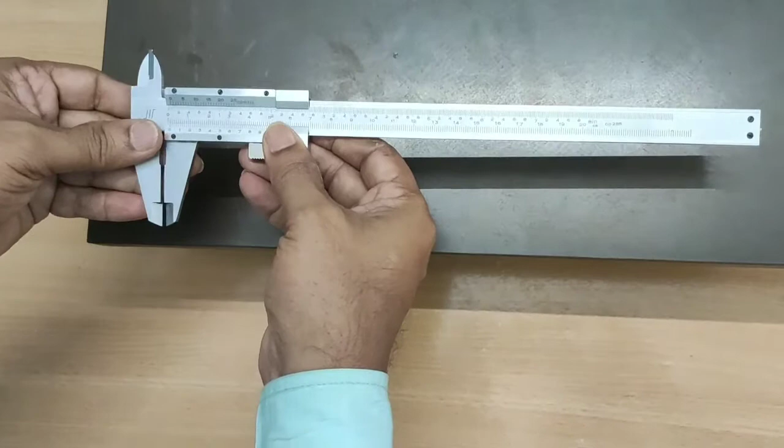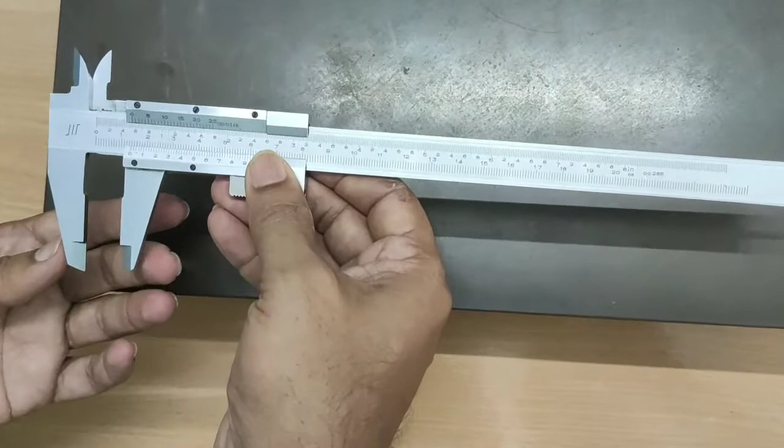This is vernier caliper. First of all, let us discuss different parts of vernier caliper. See, these are the hardened and ground measuring faces for external measurement, and these are hardened and ground faces for internal measurement. With the help of this caliper, we can go for external measurement as well as internal measurement, and we can go for depth measurement also by using this blade.

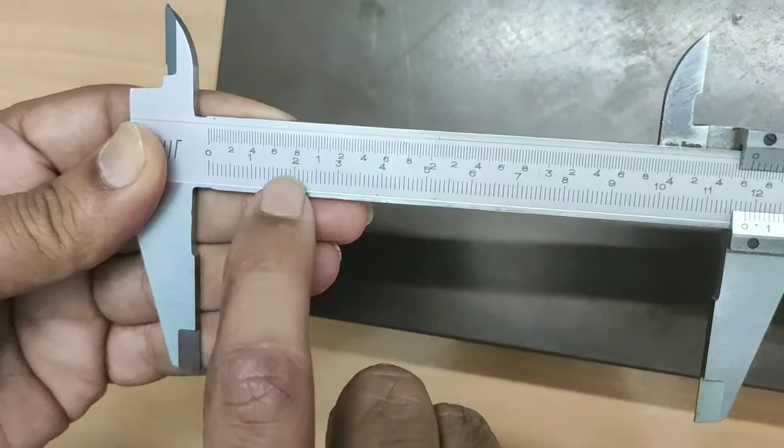Okay. Now first of all, we will find least count of this instrument. One division on main scale is equal to 1 mm.

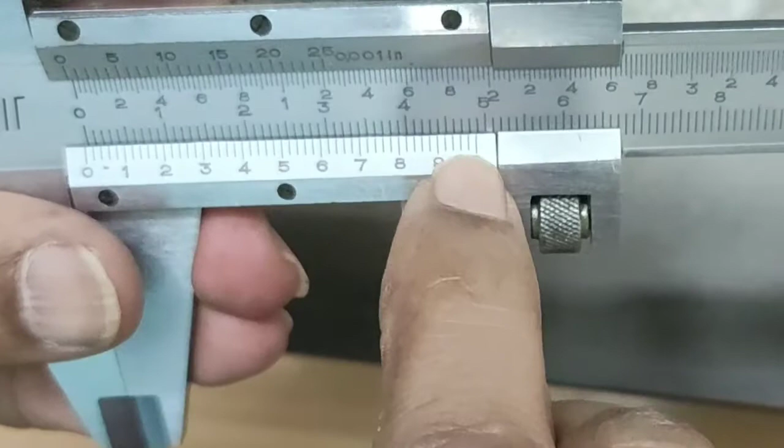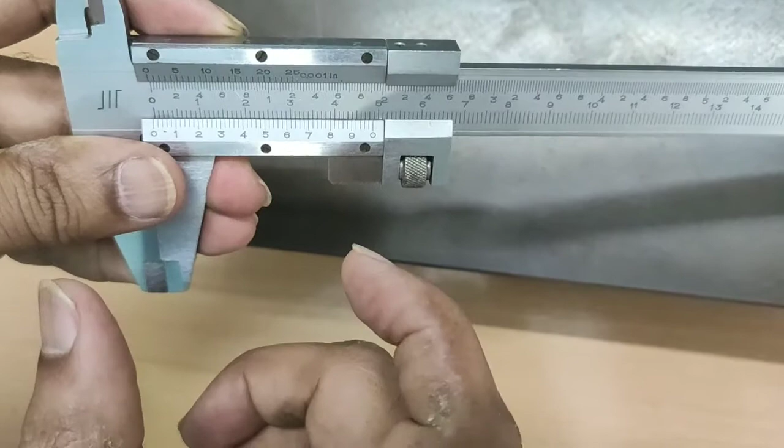And this is vernier scale. If you bring these two measuring faces in contact with each other, the 0 of vernier coincides with 0 of main scale. And if you observe here, there are 50 divisions on this vernier scale, and the 50th division is coinciding with 49th division on main scale. What does it mean? The span of 49 mm is divided into 50 divisions.

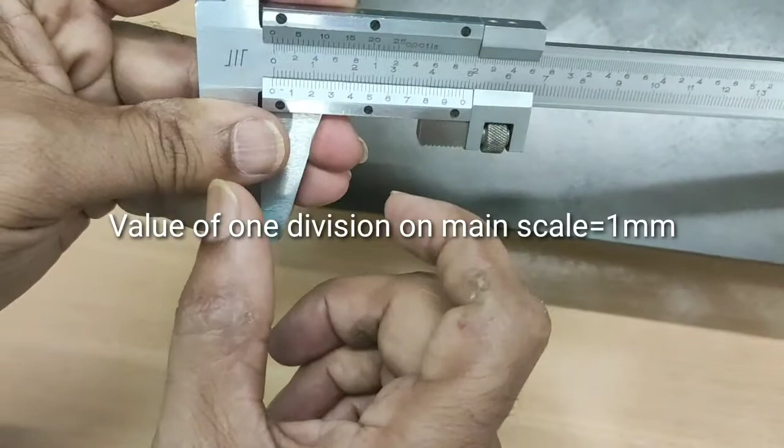Means the value of one division on main scale is, no doubt, 1 mm, but the value of one division on vernier scale will be little less than 1 mm because 49 mm span is divided into 50 divisions. Now then, what is the value of one division on vernier scale? It will be 49 divided by 50. If we multiply numerator and denominator by 2, we get 98 upon 100, which is equal to 0.98 mm. It is little less than 1 mm.

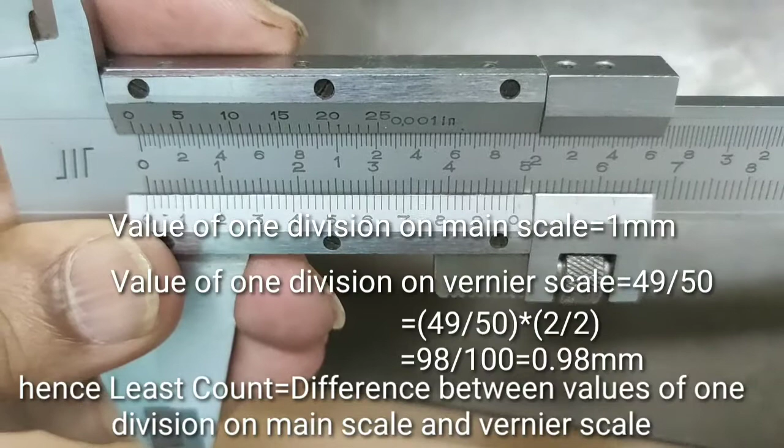And the difference between the two values, that is value of one division on main scale, which is 1 mm, and value of one division on vernier scale, which is 0.98 mm, is 0.02 mm. This is the least count of vernier caliper.

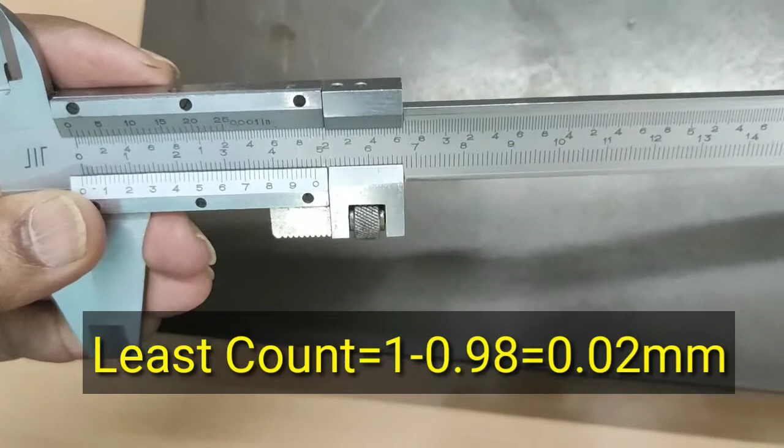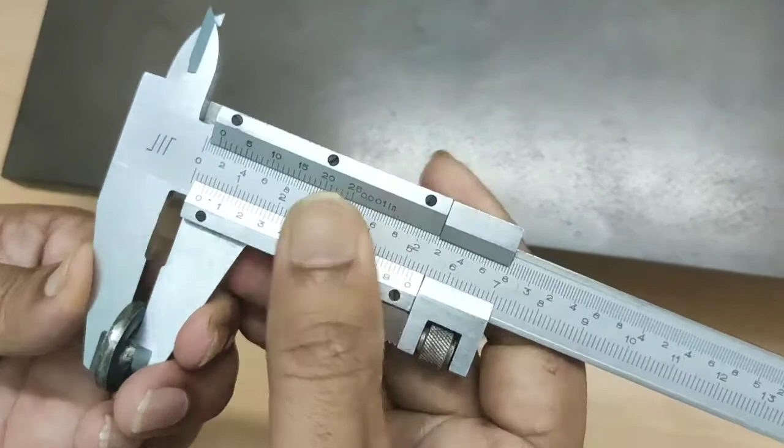Now let us measure the thickness of this washer. For that, insert this washer between two measuring faces. See, this screw is missing to fix this jaw at this position.

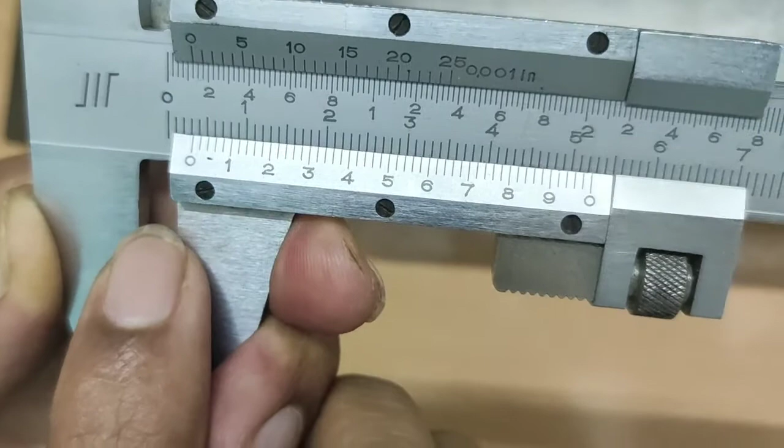Now, how to measure this thickness? First of all, we have to read the main scale reading. Here you can see the 0 of vernier is in between 3rd and 4th division of main scale. It means that the measurement is greater than 3 mm and less than 4 mm. Therefore, main scale reading is 3 mm. It is not 4 mm.

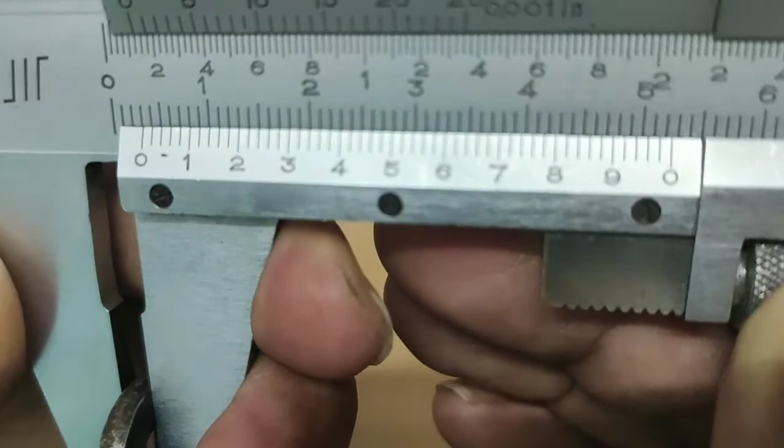We have to take the completed divisions. 3 divisions have crossed by 0 of vernier scale. Therefore, main scale reading is 3 mm plus. After that, we have to see the coinciding division on vernier scale. Here you can see the coinciding division on vernier scale is 5th division. Therefore, total measurement is equal to main scale reading.

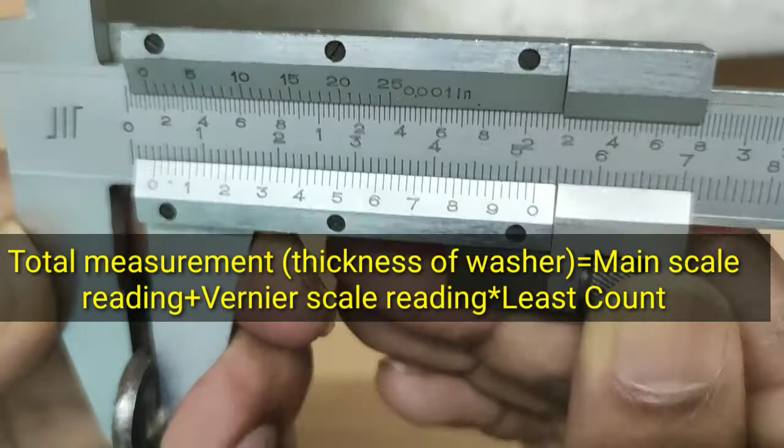Here main scale reading is 3 plus vernier scale reading. Here vernier scale reading is nothing but coinciding division of vernier scale with main scale. It is 5th division. Therefore, vernier scale reading is 5 into least count. Least count is 0.02. Therefore, total measurement is equal to 3.10 mm.

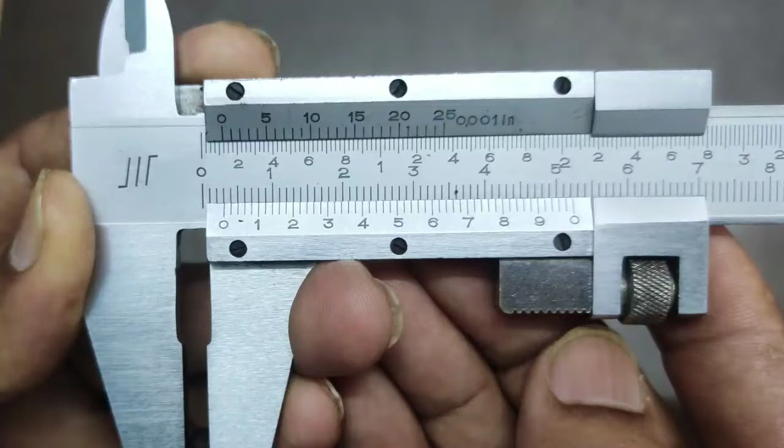Here you can see for each division on vernier scale, the dimension differs by 0.02 mm, as least count of vernier caliper is 0.02 mm. Therefore, we multiply by 0.02, that is least count, to the vernier scale reading to get the final dimension.